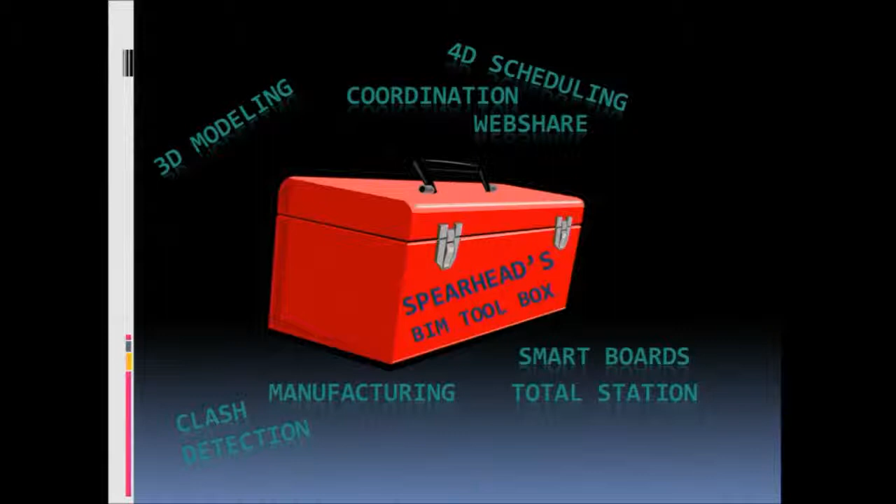Some of the tools we use, or some of the software, is AutoCAD, of course, CADWorx, Navisworks, QuickPen, Pipe Designer, Duct Designer, Revit MEP, Point Cloud. We have a whole bunch of programs that I call our soft BIM tools.

Some of the other hard BIM tools that we use are laser scanner. We have Total Station for doing layouts, CNC plasma machines in the shop and stuff, much like Reza and his manufacturing of houses. We use tools for manufacturing metal.

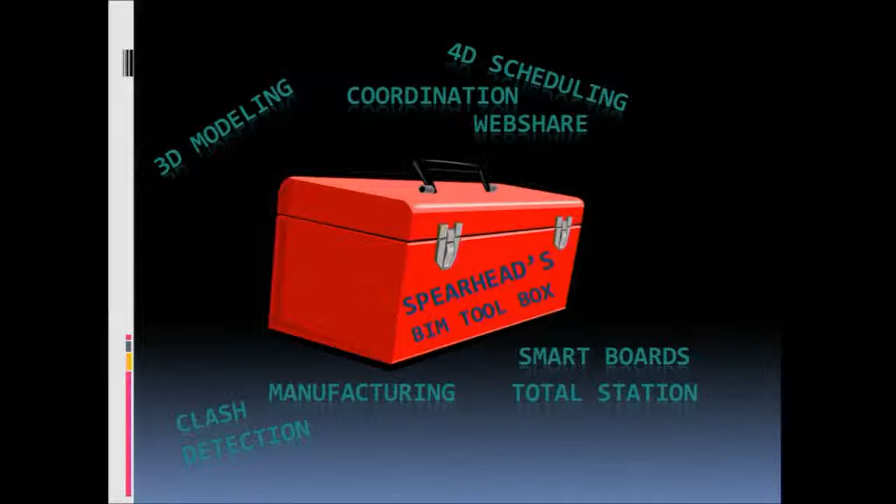But today what I wanted to talk about was laser scanning. So I'm going to try to not rattle on about everything else and maybe just focus on how we use laser scanning as one of our BIM tools.

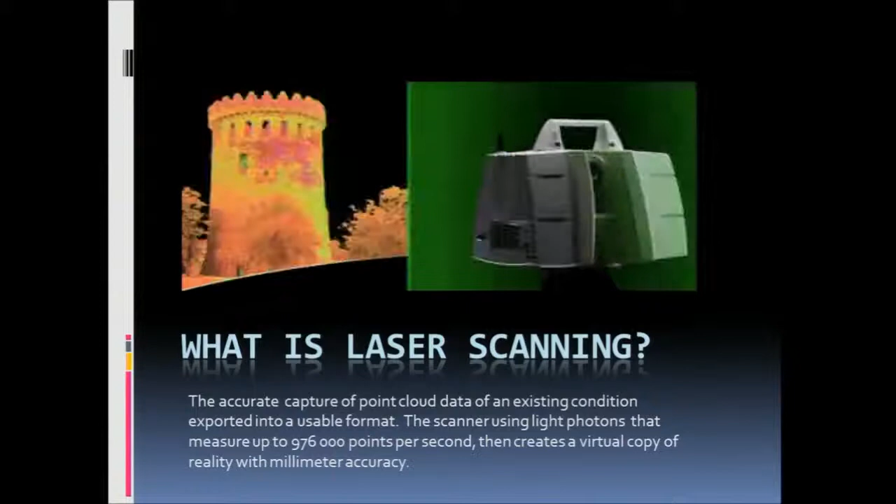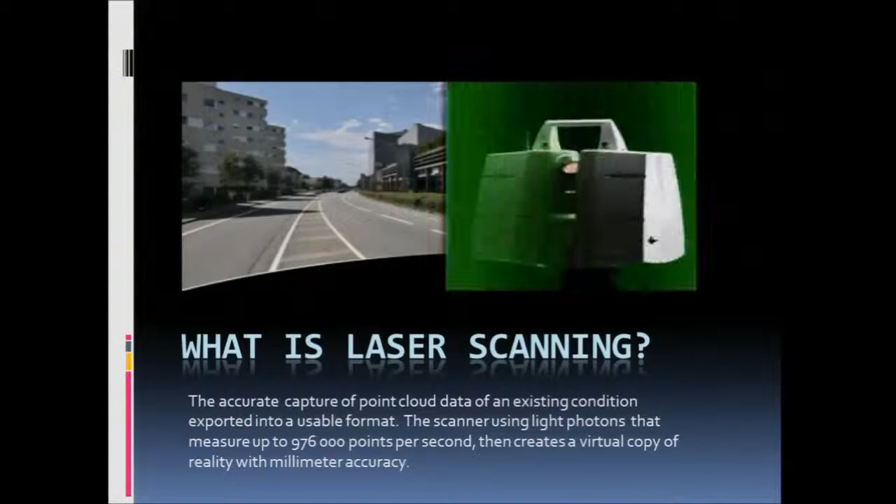So what is laser scanning? I guess in a nutshell, it's a fancy machine that twirls around and measures millions of measurements. It just takes measurements and puts a point on the end of every one of those measurements, and that's what you call point cloud.

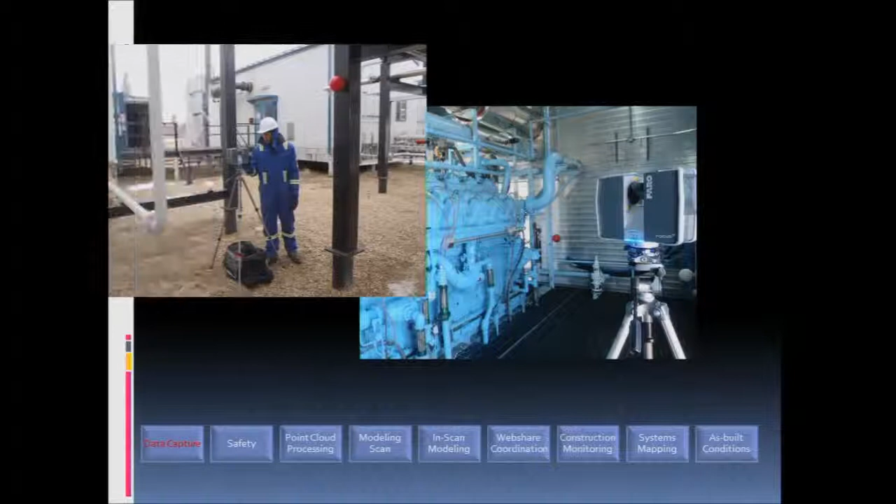So the first step to scanning is basically doing the site scans. How the scanner works is it's a line of sight. So we take the scans. A typical scan doesn't take very long, maybe 6 to 10 minutes.

Once the scan is complete, we move it to a different location to do another scan. Once you have multiple scans, you can put them together and it creates the 3D image, which we use for our modeling and stuff.

Our scanner also takes a 3D photo, a 360-degree photo of everything while it's scanning. It takes that color and puts it onto the point cloud, so you end up with a full color point cloud, which is really invaluable. I don't know if anybody's worked with point clouds, but the black and white ones are really, really difficult to work with.

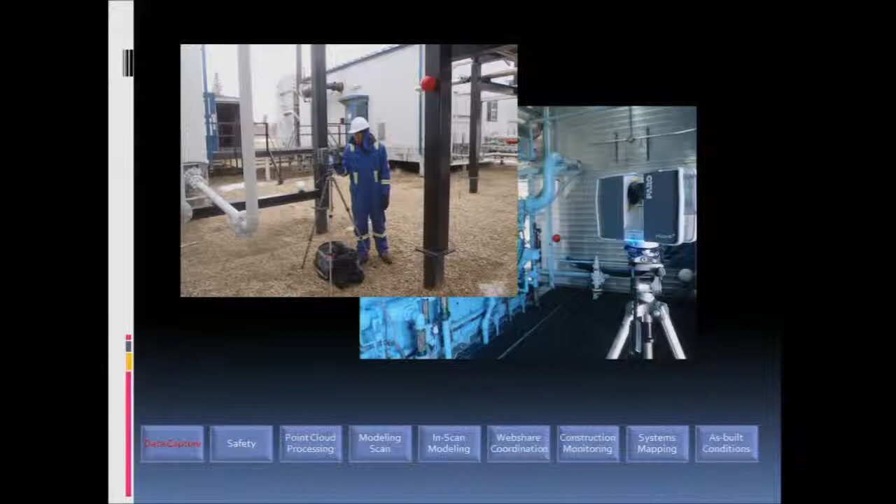These things are quite precise. They'll do about 2 millimeters at 120 meters. So when you do multiple scans and put them together, you end up with a really accurate capture of exactly what was there at that time.

They'll even do up to HD scans. They take hours, but they do work. One of the benefits to scanning compared to conventional data capture is that it's very quick and efficient.

Normally you have a couple guys out on site, maybe ladders, zoom booms, whatever, taking measurements. In a good day, they might take a few hundred measurements, whether it's with a tape measure or a total station. Then they go back and try to put that into usable data, plotting it in AutoCAD or something like that.

With laser scanning, you have one guy who can go out and capture millions of measurements in the same time period, without the use of ladders or zoom booms or whatever you need to access those points.

It's also a great tool in oil and gas, where we have H2S and other environmentally dangerous parts or places. You can go in and capture all the data you need in a very short period of time and get out, which really lessens the exposure to the elements. Confined space is a good example of that.

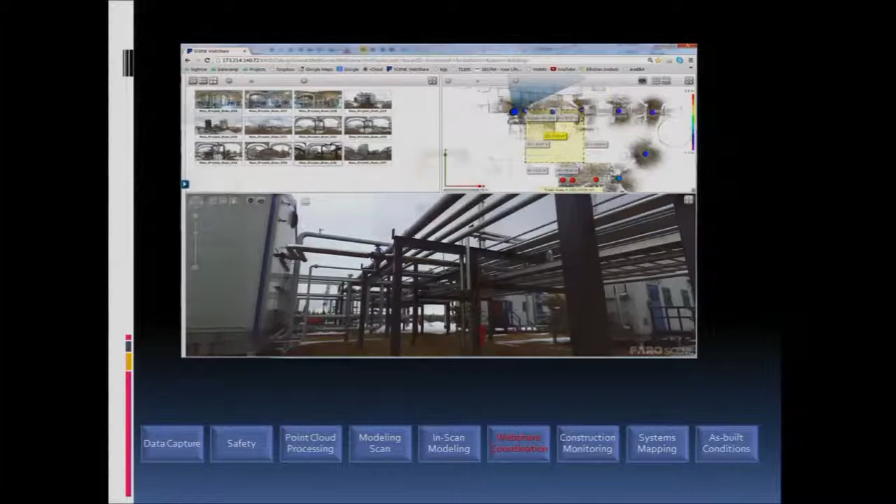This is a gas plant. Up on the top left, you see icons - you can pick the individual scans that way. On the right side, there's a plan view where all the scans were taken of the area. I should note that's all dimensional as well, so you can zoom in and out and get fairly accurate measurements in areas of the scans.

The third one is the photo bubble. What you can't see in this one is you can pan around, zoom in to read valves, read data. It's a lot like Google Maps street view where you can go in and look around.

So the advantage this has is that designers, engineers, construction, everybody can use this tool for collaboration. They don't need to leave their office and drive 3 hours to the construction site to talk about something. They can all go online, have a look at the scans, see exactly what they have out on site and what they want to do about it.

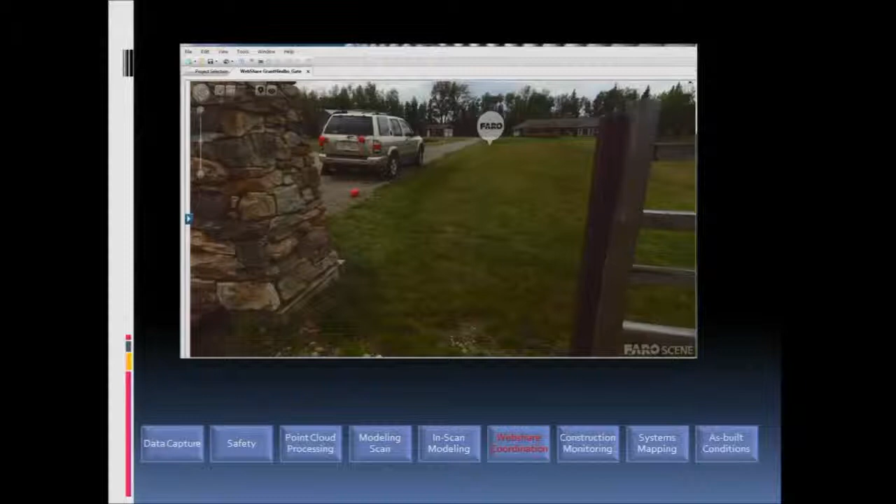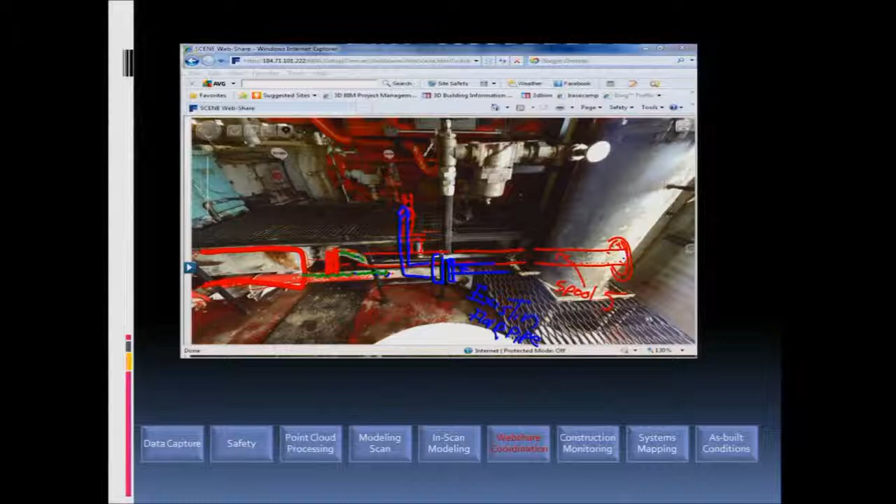And then the other thing we do is host - we have a smart board, so we will host WebEx meetings or smart board meetings with our customers so that they can go on and actually make design decisions. Here you see, they must have been adding some piping or something into that spot.

We have a few clients - Suncor is one of them - where a group of engineers don't even go out to site and look anymore. They just phone us up and send us out to scan it, then post it onto the internet so they can do their designs and hash through issues without driving.

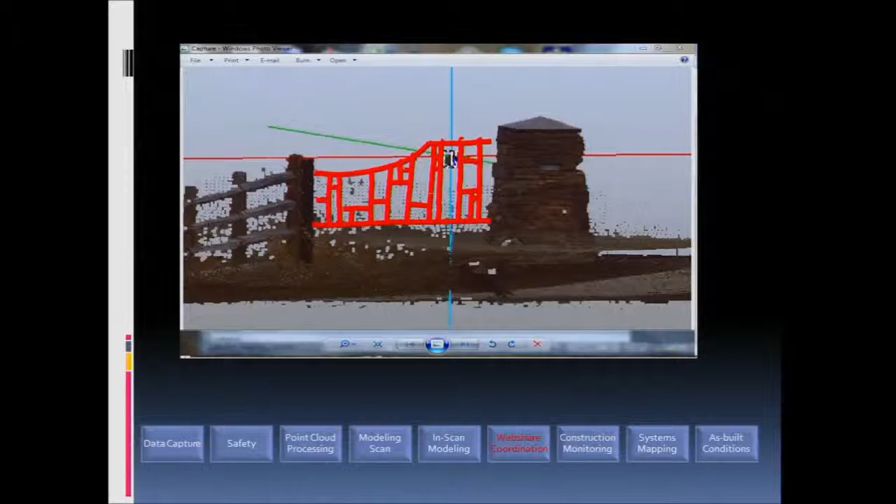We also, as I said before, have a manufacturing business where we do lots of process piping and stuff, but we also have a little wrought iron business that was kind of a hobby that got away on one of my guys. He actually uses the scanners now for almost all of his stuff.

So if he's doing a spiral staircase, or in this case like a little gate, he'll actually go scan it and bring it back to our design team to get all the measurements. Because every time he goes out there, he doesn't ever get them all - he's always missing one. This way he can create a rough design really quick within minutes and show his customer what they're going to get.

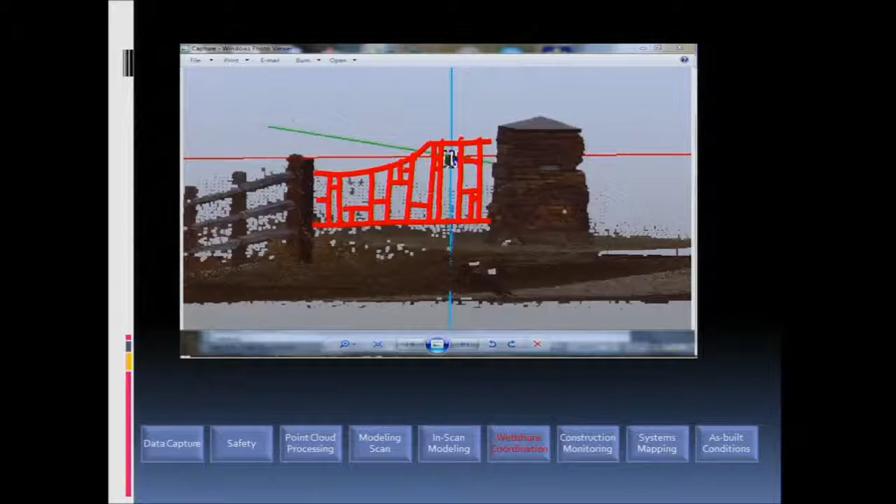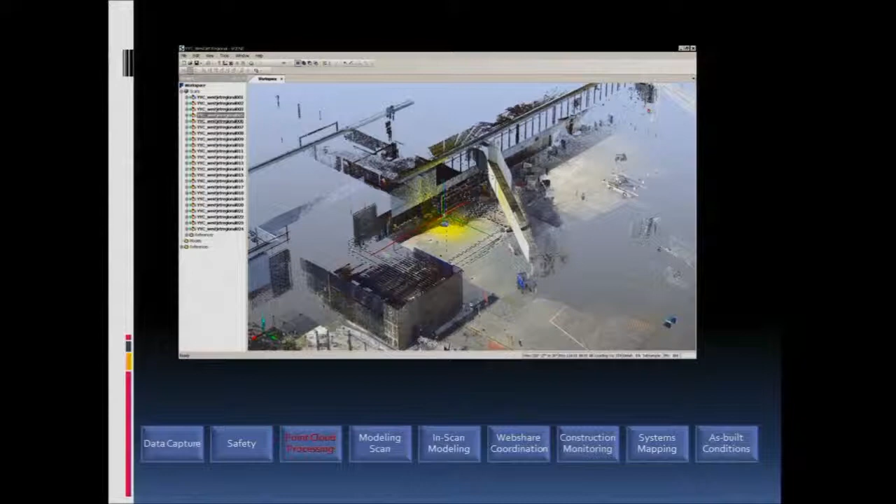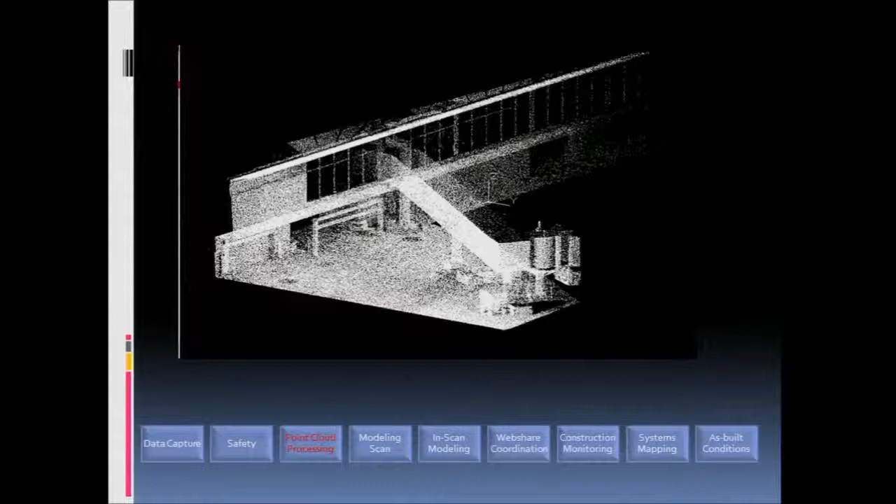So there's just a photo of the same thing. Once all our scans, you can see on the left, it has the multiple scans. They're all processed and stitched together, creating the 3D model, and then basically a black and white point cloud. That's hard to work with, so we go back and reprocess it and add the color, which is really just a click of a button, but it makes a big difference when you're working with them.

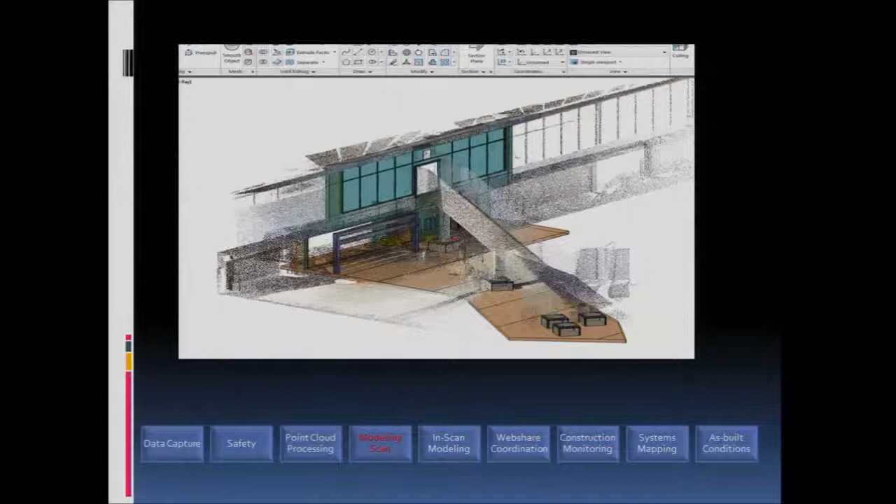From that point cloud, a lot of times it's quite heavy, you've heard about the massive data. Point clouds aren't something you just email. So often we'll take that point cloud and model it. This can be modeled in anything, Revit, AutoCAD, whatever tool you like to use. Point clouds can be brought into pretty much any software these days. Once you're done, you end up with a 3D model that's really easy to use for the design team.

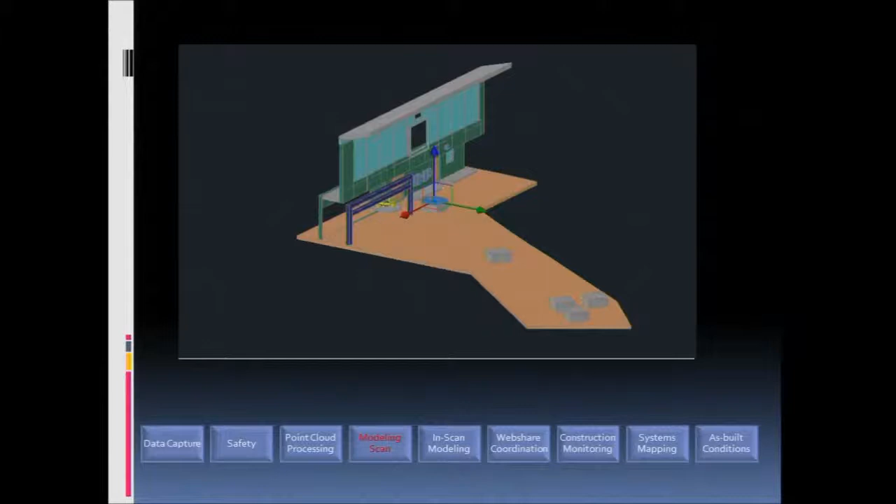So I said before, I'm a plumber, I'm not really a public speaker, so I got a lot of pictures here to go through and show you the other ways we use our scanner.

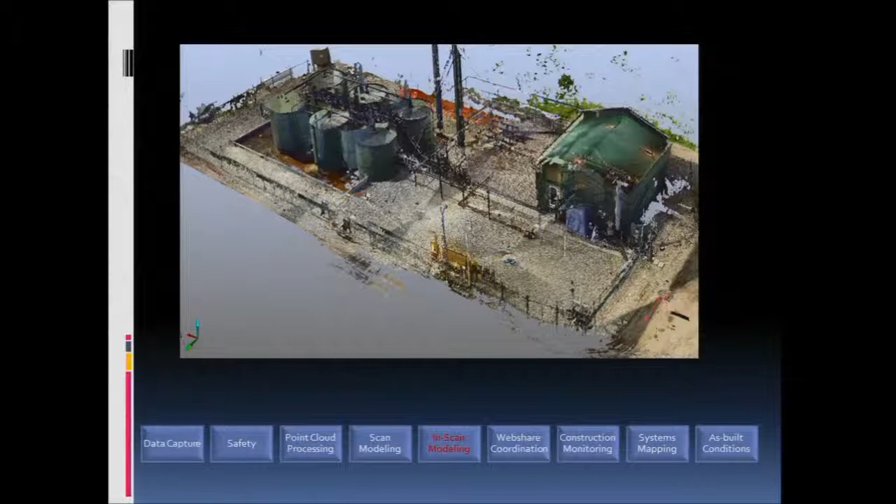That's just a picture of the overall scan. What we do is a lot of modeling of process piping systems and equipment. We actually model in the scans. For the most part, they're fairly easy to work with. You don't need supercomputers by any means to use them once they're processed right. They're also almost like a reference, so you can turn them on and off while you're doing your work.

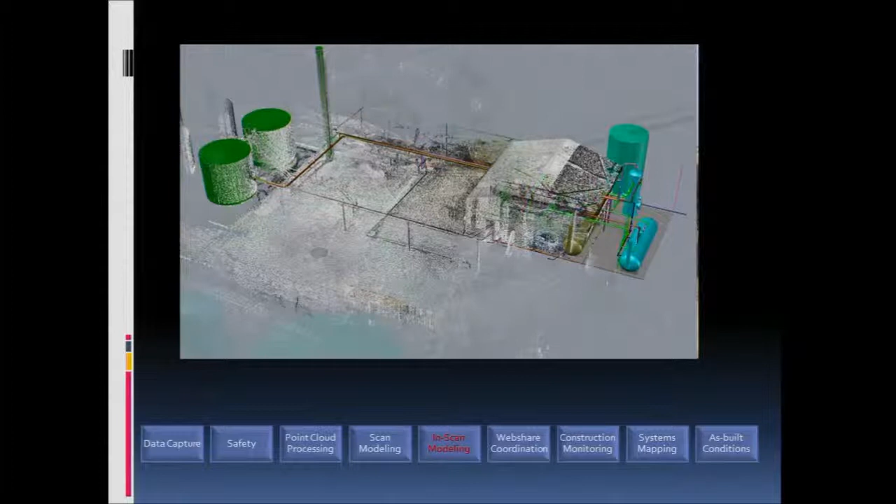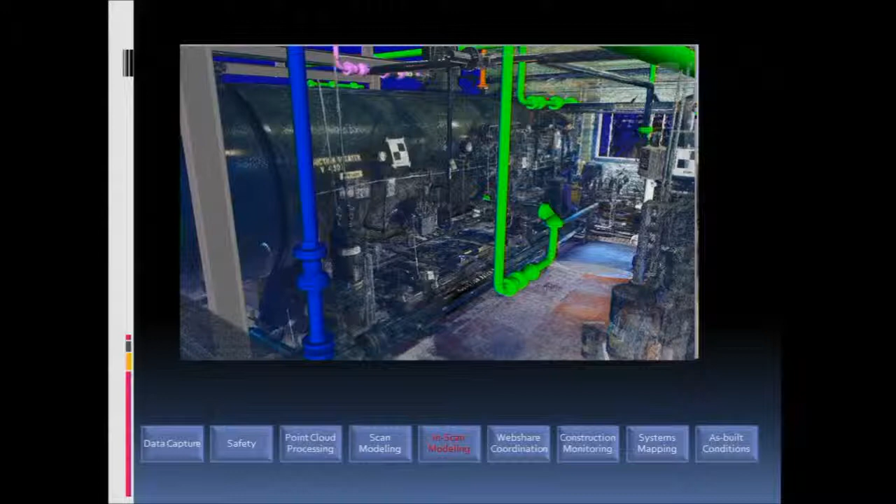Again, these are just a series of images of some of the process piping we've done. The scans are incredibly accurate. When you're modeling in a scan, you know right away what the issues and problems are going to be. One advantage of doing this in the oil and gas industry is they don't like to shut plants down too often, it costs them money every day they're down. So we can go in, scan, design, and fabricate the bulk of that job before they need to shut it down, and it saves tons of time on schedule.

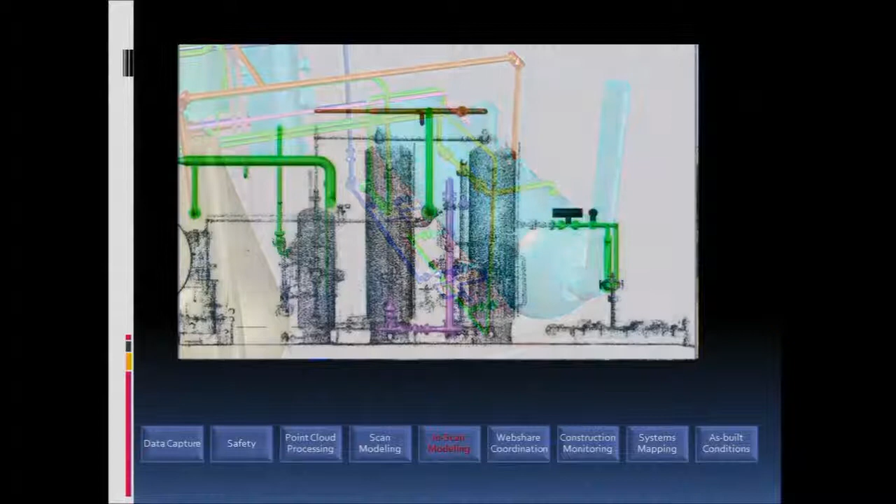This one here, I put this in, this slide is just a vessel that was added into an existing building. So we went and scanned the vessel and then created a model of it and put it into our design. Again, point clouds are fairly easy to use, it's not anything to be scared of, they're quite easy. Here's just a slice of the scan when we're working in it.

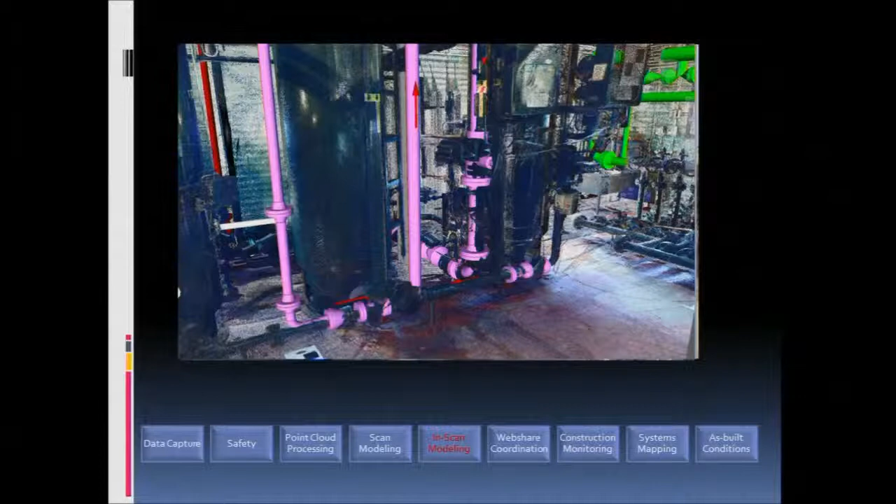We also work quite closely with the construction team for installation as well. We'll make sure they have all the necessary tools and programs so they can actually utilize what we've done. So we do a lot of hands-on training with them as well.

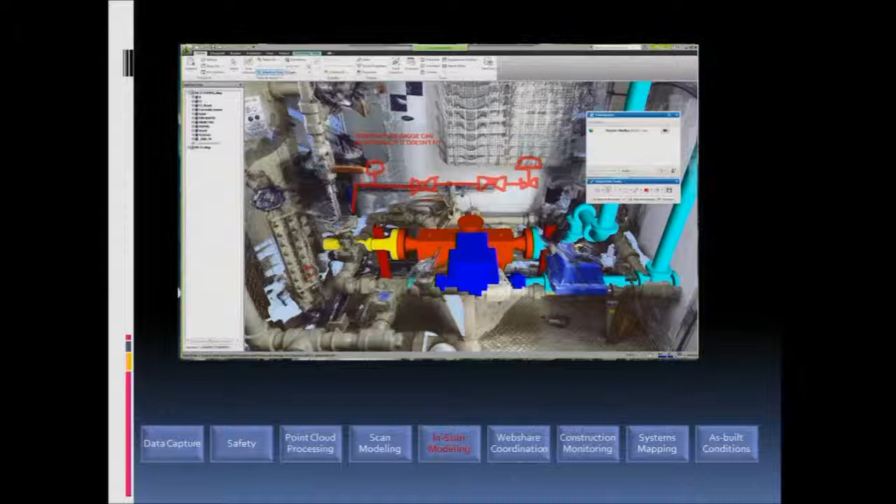So one of our other projects that we've done was a Nestle plant.

This Nestle plant had a team of engineers in Florida, and the plant is in Alberta. They would fly into Alberta once a month for a week, take pictures, and try to come up with a way to revamp their plant.

After about 3 or 4 of these trips, they decided maybe it wasn't going to work, and they'd end up having to move a few of their guys down for the next 6 months to go through the design. So we proposed that we'd go and do a complete scan of their facility.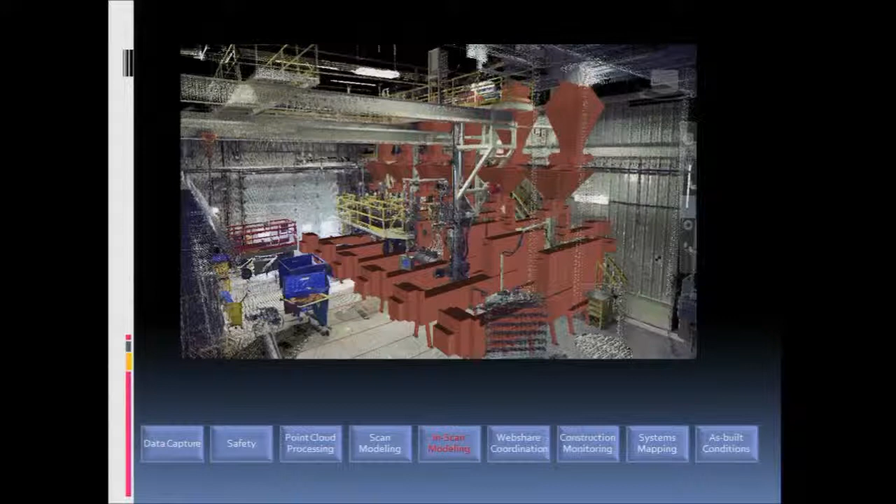So that's what we did. We scanned their entire facility, put it onto the Webshare so they could all use it, and created an online project for them. I think it was a Basecamp project so their maintenance guys could work with it.

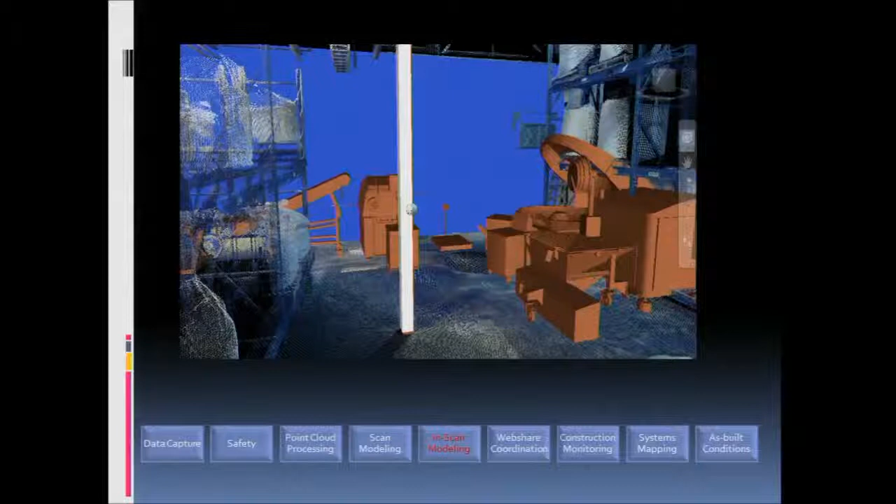And come up with a plan on how to deal with this massive change they wanted to make to their plant. After they went through a bunch of sketching online, they were pretty impressed that they didn't need to fly down and take pictures anymore. So we went to the next step and started modeling their equipment for them.

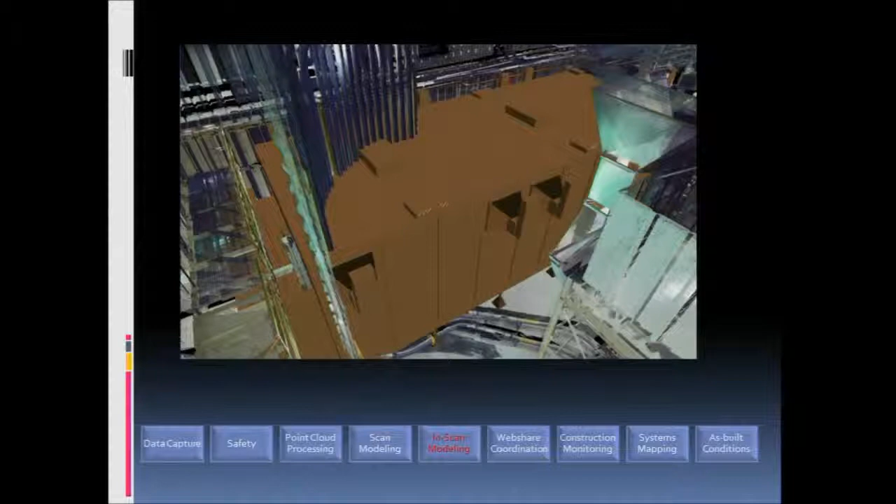We modeled existing equipment that they had in other plants, created a 3D model for it, and gave them the models. In some cases we placed them where they wanted so they could see the impacts. Other times they just used those models themselves in AutoCAD or Navisworks to make their decisions.

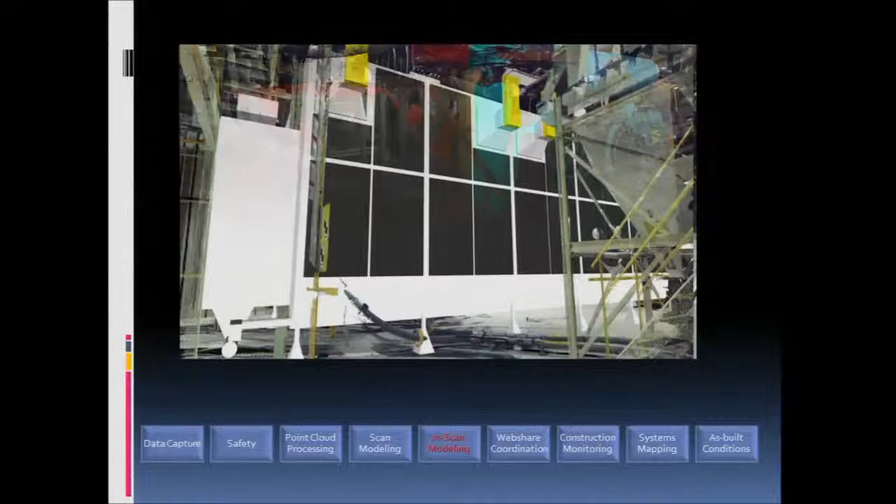So these are some of the snapshots, if you will, of that.

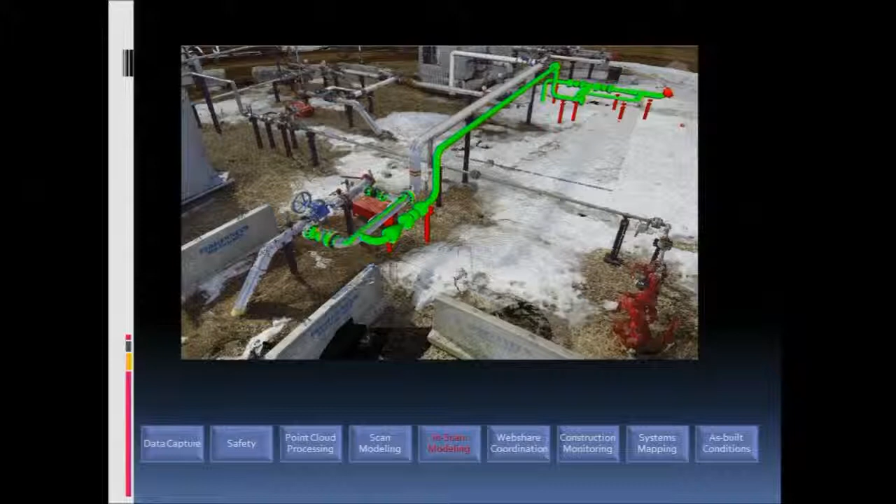Again, the laser scan is a great tool for giving you confidence in manufacturing. It's so accurate that the flange bolts line up — you can tell if their flanges are out 1 or 2 degrees. So it allows us to fabricate all that stuff off-site and then just show up and put it in.

One of the other things we do is construction monitoring. When they have underground work, we'll come in and do a scan before they bury it. This one shows the model, which was the intent of, I guess, a tank farm. Once they built it, we scanned it and overlaid it with the model to see the differences, so you can tell if it was built to design.

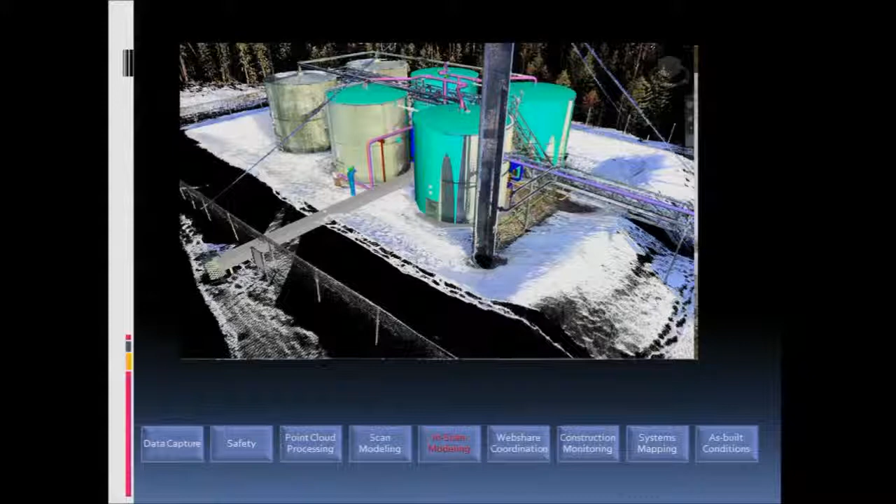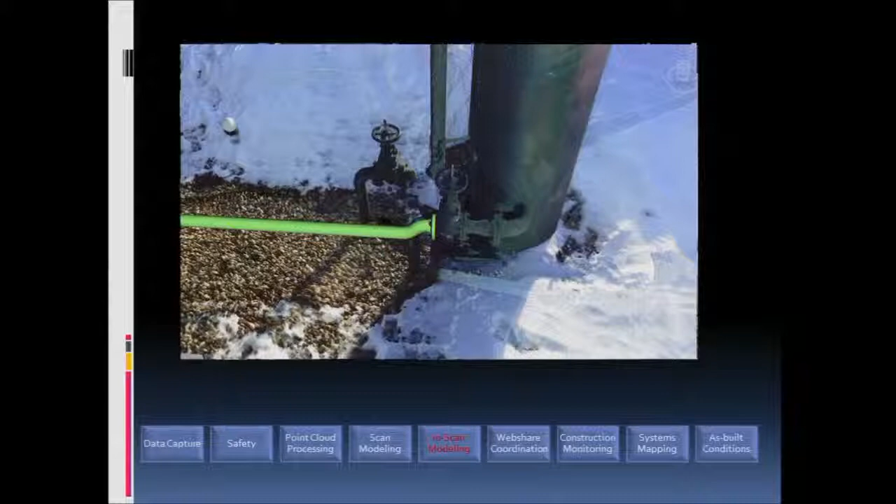That's just some underground pictures. What you're looking at there is an actual scan, not a photo — even down to the little wrought iron railing again.

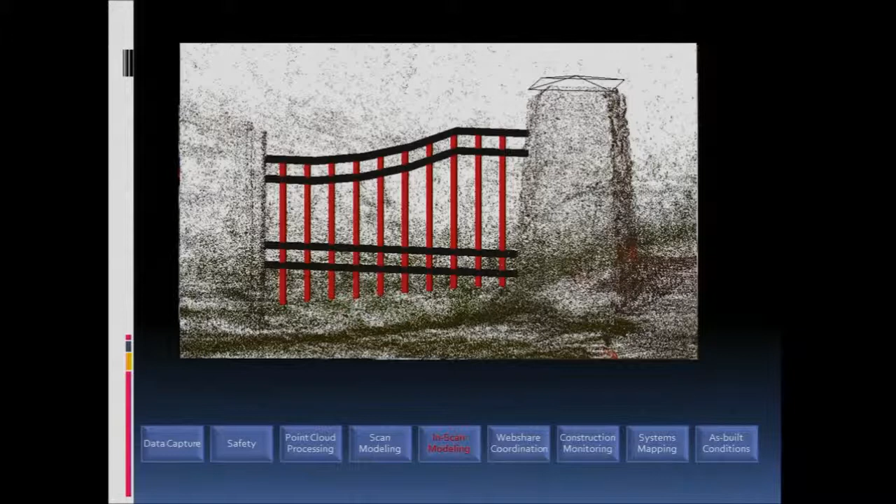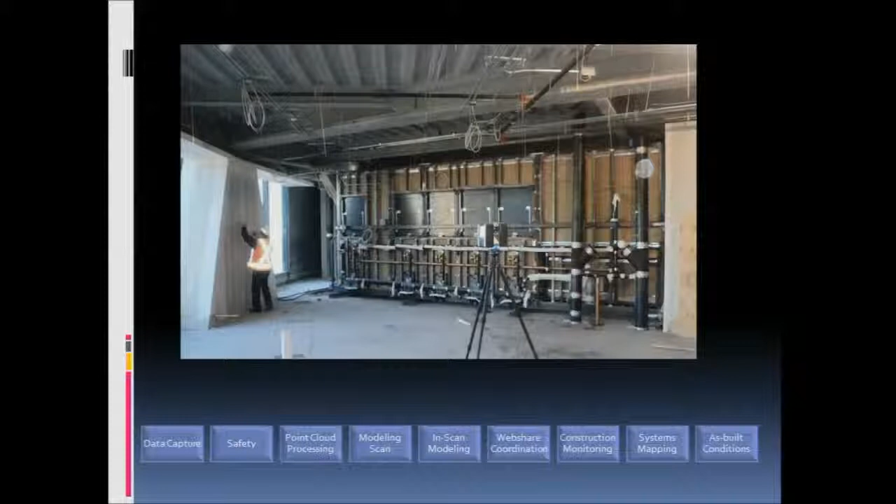The scanning technology is actually fairly inexpensive. It's a great tool, and lots of construction companies are purchasing them and getting into this.

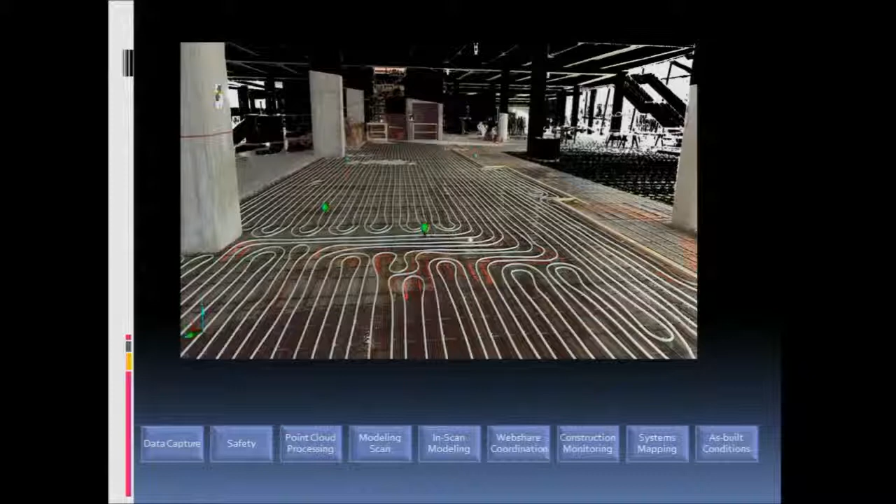This is a photo I got from my friends at Ellis Don at the Calgary airport. They're doing all this heating piping in the slab, but because of the job schedule, they have to go back and do a bunch of coring afterwards. So they purchased the scanner and are doing scans of all the in-floor heating before they pour the concrete, so when they go back they'll have an exact record of where that is. It doesn't look like they have much room left to put anything through there, but that's just another use for it.

I guess as-built conditions is a great use for a laser scanner. You have a record of what was there at that time, so we do a fair bit of as-builting with our scanner.

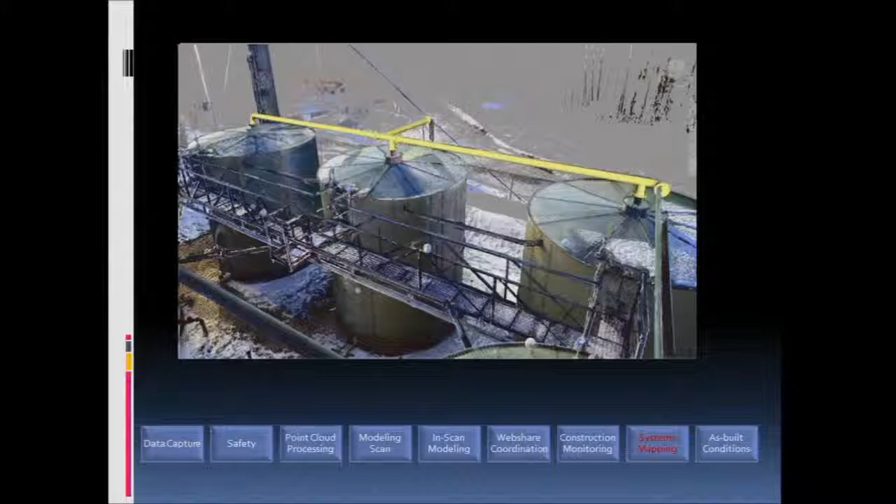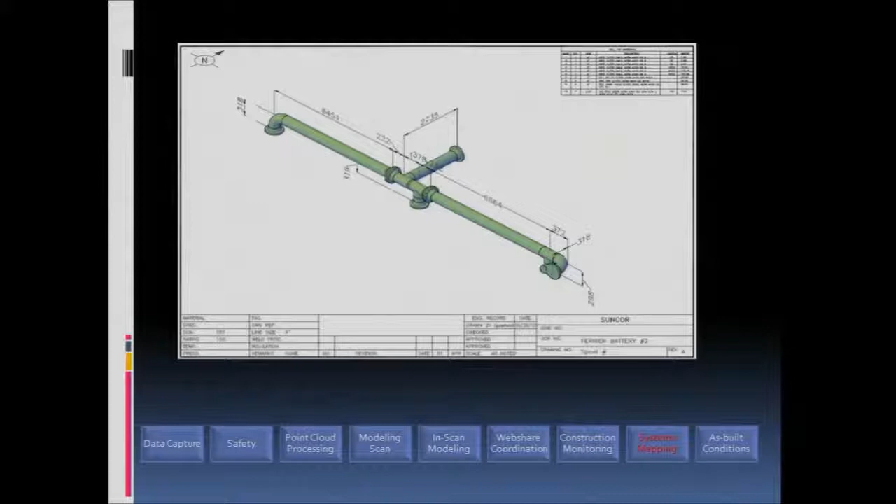One of the other things we do is map out critical systems for NDE testing. In this case, they have to test that piping at certain points over and over again every year. So instead of trying to go back and figure out where it is, or draw all the isometrics of every piece of pipe with all the test locations on it, we go through, scan it, quickly overlay the model in CADWorx software, and spit out a spool drawing of it.

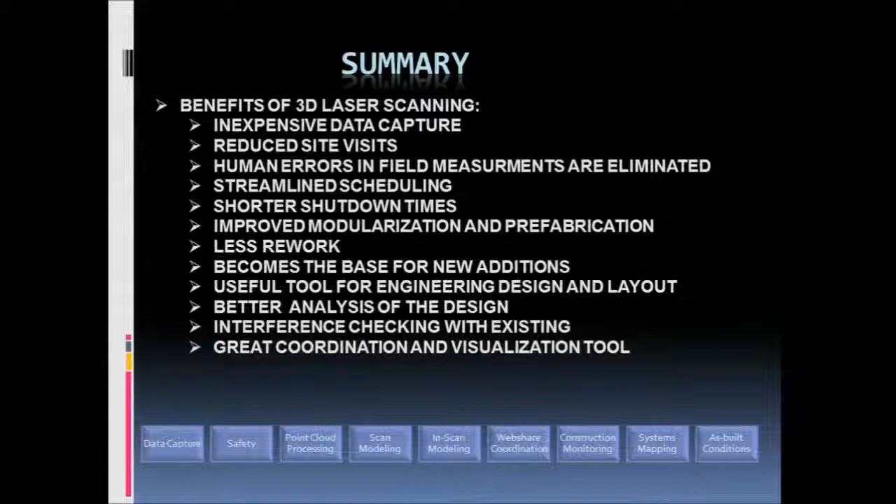And that's about it for my laser scanning presentation. It's just one of the tools in our toolbox that we use every day, and I think it's something people shouldn't be scared of. It's not all that complicated, and it's a great tool for construction. And that's the end of my presentation. Thank you.